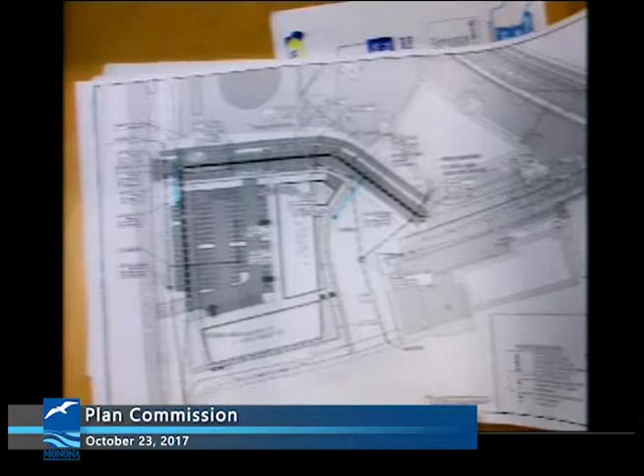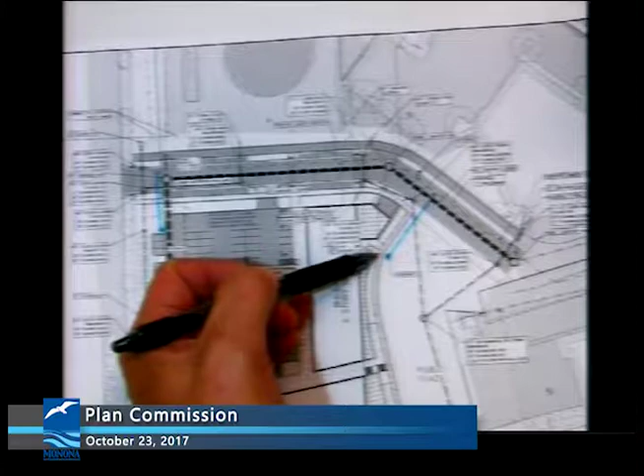So fire hydrants, you can see highlighted in blue here, 2 proposed fire hydrant locations. Monona requires that the building be within 300 feet of fire hydrants, all corners of the building. So they added the 2 fire hydrants, which is good. The only comment is this one is shown in the park right now. Sonia, maybe that's a question for you: does that get squeezed back, or where's the property line? Does that have to be on the private property side, back on the other side of the walk somewhere? Can that be fit in, or can it be allowed in the park? Probably just a planning thing as we move forward, but something to note.

The other small thing we were asking for last time, and again it'll have to be verified as they move forward, is fire truck access, and maybe you've already done those turning movements to show they can get through here, and maybe a detail of what's going to happen out here concrete-wise. I think the city just wants to know what that is going to be. Thickness, detail, what are we talking about? And again, pretty minor stuff as you move forward.

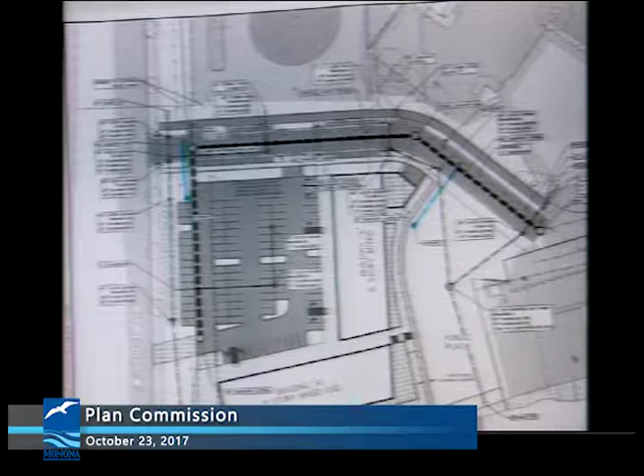So the bigger question tonight was on the stormwater. We've been waiting on the stormwater for the entire site, for the full GDP, and how that will look with just this first development and then overall fit in on the site. The requirements per the DNR, NR 151, and the city ordinance are going to require, because this is a redevelopment, 40% TSS removal, so total suspended solids that have to come off of this site in the stormwater. I should point out also that because of the soils on site, the infiltration standards don't need to be met on this site. So we're really just worried about the total suspended solids.

And that has to come from parking areas or the roadway. The landscaped areas, the roof water, stuff like that, is exempt. That's noted to have 100% removal, that there aren't solids on that. We're worried about parking areas and the roadway as part of the project. So we received their model as part of this.

Excuse me, I'm going to interrupt so I don't get lost. Yep, go ahead. It's super easy for me to do. 40% needs to be removed? Yes. 60% does not need to be? Does not. Okay. Because it's a redevelopment. If it was new, it'd be 80%. But because this is a redeveloped site, it's only 40%. Okay. Per the DNR, per your ordinance, which is pretty typical.

So we received their stormwater modeling, and at first they were reporting around 59% based on what they were going to do. I think, Randy, we worked through it a little bit. It's actually closer to 41. They're still meeting it at 41% removal, and I'll walk you through what the plan is and what they plan on doing as part of the overall site.

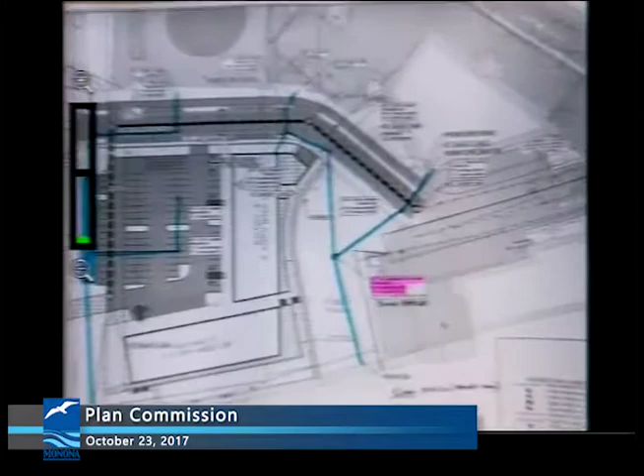Coming into that sump there, I tried to highlight this in yellow just so everybody could understand it. You'll see an invert elevation of, let's say, 842.65. Plus you have 3 feet below that for the sump, so you're around 839.65. The water level today out on the river is 845.20. So it's about 6 feet or so lower than the water.

Kind of like New Orleans. Yeah, a little New Orleans.

But now remember, the surface of this park is actually set roughly between 848 to 847. The 100-year flood elevation is 847.70, so it's about 848. And that's pretty typical. This area does, on a FEMA map, show that it takes on a little bit of water as part of a 100-year flood elevation.

Now, those lakes are controlled, and the target max that they want to be at is exactly the level it is today, 845.20. So they can control that with the locks, but if you have a giant storm over the greater Madison area, you do have a risk of that coming up. So we have to design for that.

So in order to get the TSS removal, the 5%, this all has to be set with sumps, and it has to go into this sump, and the water from the river can't backwash into it. If the water comes up and starts to flood the system, they don't get the TSS removal, and they don't get their 5%, thus you can't really model it. So right now, it's a bit of a difficult situation.

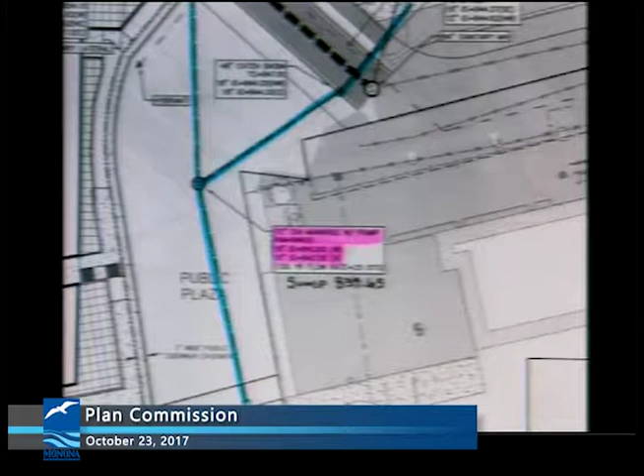We've talked about it, and in my report, I've talked to Randy a little bit about it. Can we remove some of the stormwater? And I think there's a possibility to do that. Maybe not take on quite as much volume here. Right now, A comes into this. Oops, I'm sorry, I forgot to zoom this out.

Building A comes into this network. And maybe A can come this way instead. The buildings can come this way instead, so they're not part of this network. Building C comes into this network, and maybe that water that falls there can also go out. And I think both of those are probably feasible options.

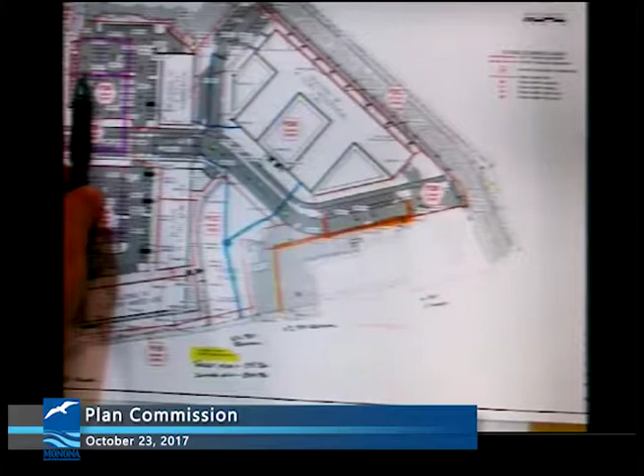So you could move basically the buildings and all the parking lot this way. And you could also, instead of all of Building C in 2 spots coming into this blue network, maybe you can get part of Building C to go back to Bridge Road, as part of that lot does today. Those are things we probably would have to work with the developer a little bit on, because the city's going to be ultimately in control of designing this street and this blue section of storm sewer along the road, this orange and blue. So I think there's still a little bit to be determined there.

It would be really great not to have a stormwater pump station in the park as far as an operation and maintenance concern. And there may be a few ways to do that. Right now, this road is set up so low to tie back into the yacht club and the breakwater that we have to maintain some of the elevations along here, which is setting the road low, which is also setting the storm sewer low. So if those buildings were out of there and we did not have to match in the asphalt, we could pick it up a couple feet and probably get this to drain.

And I still think maybe there's some ways through open channel drainage or a little bio basin down here. Randy and I talked about it, maybe we can raise this road up about a foot and be able to get rid of this pump station. But that still is to be determined as part of the project. It does work stormwater-wise. It's just probably not the best solution. Well, it might be the best solution, but we're not sure. I think we've got to vet it a little bit more, and I think that can be done. I don't want to hold back the development because that one piece still has to be figured out, but there still probably needs to be a little bit of work done there. So that's mainly the big stormwater push.

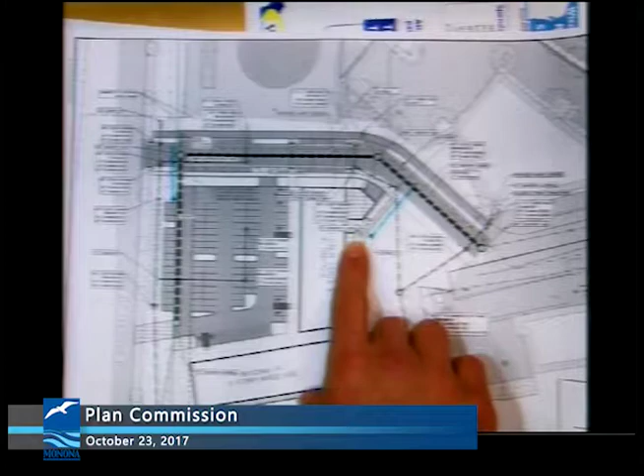And when I looked at the landscape plan, I went and checked that there's a spot there that you could probably just readjust a little landscaping and throw it in there. I think it would help the fire department, because that's where you look, and B, it would help for park planning not to have it in there. But I think the biggest thing for me is the safety on it.

Floodplain, are we good that we have no net fill in the floodplain? It does not appear that we're going to have any. Because I see some of the floodplain where the building's being built and where some of the patio's going to be. So did we just make sure we have a net neutral on the floodplain? I think maybe we should just double check it, but I believe that that's still flat and maintaining the grade along there, but that's something we can look at a little closer. We're allowed to do a little bit of minor grading as long as we just don't add to it.

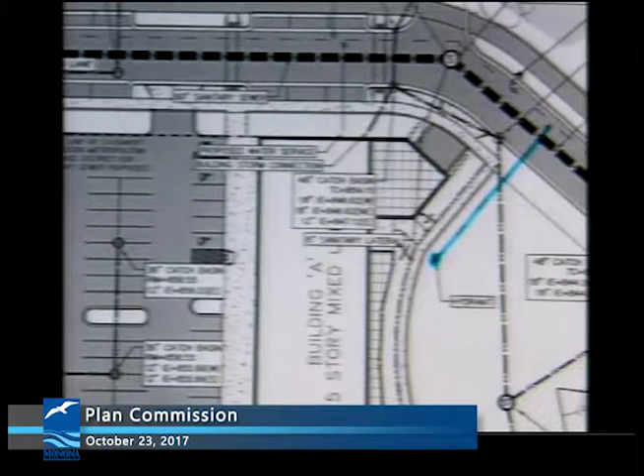As far as the park elevation going 47 to 48, the lake was at 46.8 for a time this year with all the rain we had. So literally, the lake would have been, with no waves, lapping at the edge of that park area, which is another good reason not to have a pumping manhole in the park, because it could very well go underwater. I know there's not a lot of waves on the river, but it was within a couple tenths of that elevation. So that, to me, could be problematic. So if we can have some type of a closed system where we can't get water into it, or trying to pump it back out, that would be nice, because then we're just recirculating the lake.

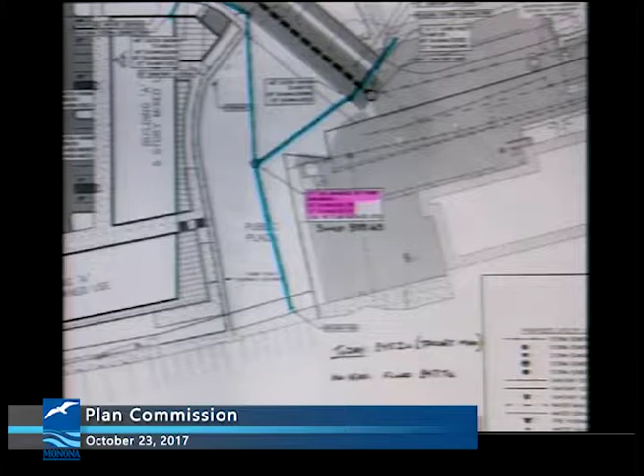That's it on civil. We talked about it a lot, and we normally leave stormwater to our consultant, and if you've read the recommended condition, it's that you work with Josh on it, and then if it doesn't work out and you think he's unreasonable, you can always come back to planning commission and say, hey, we've come to a head here, and we just don't agree. I don't anticipate that, but you always have that right, and that's why that condition's written that way.

Thanks. I have a question, at the risk of potentially the wrath of at least one person on the panel. And that is, if we're obviously so concerned, appropriately concerned, with the stormwater issues, I recognize that the 40% TSS requirement relates to parking and roadway and not to roof, but given that a green roof in fact reduces stormwater by 60 to 100% and cleans the water at the same time, would not looking at green roofs be another way to mitigate the volume, given that we're looking at increased cost of rerouting, regrading, or having to put a water feature in the park that we don't even know how it's going to be designed yet?

I mean, the hard part is, yeah, you're putting the green roof on, but you can't really model that. Are you going to be able to model that, Randy? Well, no, I mean, I think... Because that's exempt?

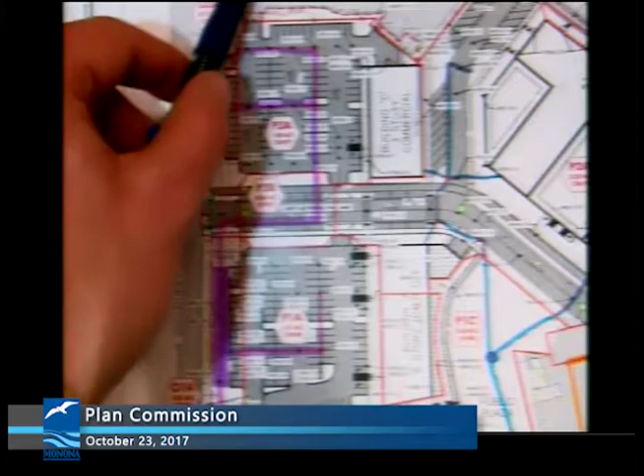The hard part with that: as part of ongoing conversations with Dane County Highway, we're putting some cross sections together through this area to show them and ATC exactly how that's going to look when this is done. It's hard to see on here, but there's an inlet from the Monona Bank and end wall here, as well as from the ditch further to the west. And there's an inlet that discharges into the existing swale now. At full build-out, we're going to have to hard pipe that all the way, because we are planning additional parking up on the west end here.

And so it kind of shuts that swale off and prohibits flow, and just based on proposed elevations in the parking lot through here and the existing sidewalk, it's pretty flat through there. So you will not be able to grade in a swale with the side slopes and get that to drain all the way back. In the interim, when phase one goes, we are simply going to stub out the storm sewer structure with an end wall and pick it up as it sits today. But once phase two and phase three ultimately go, that is going to be hard piped the entire way.

The only way to maybe get more is to reduce parking, and obviously, we've been down that road, right? So you're maximizing the parking, which limits the space that we have. They have the ability to treat some of the storm water, so it does push some of the treatment to go back down to the park. Regardless, though, down here at the park, you still have this issue with it just being so flat down here and water backing up into this line no matter how you set it.

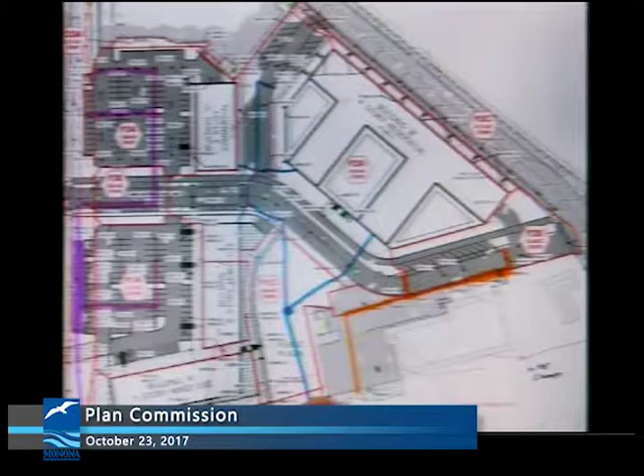So there may be a little give and take here, that even if we can get it to flow, maybe some of this line some days is full with a little bit of water. It's got a check valve on it at the bottom, and the pressures push it out, but once in a while, they have to clean it out because it gets full of sediment. Chris? Two questions. The last thing you said, a check valve. Do we really want a check valve? Because if those aren't maintained, then they become an impediment.

I agree. And if the water is going to back up in the line, the worst case scenario is it's going to come out the inlet in the road. Right. But once the water's that high, we still have the same situation. I agree with my experience with check valves. People don't know they're there 5 or 10 years from now. They forget about them, they don't get maintained, and they seize up. They just lock up, and then they impede the flow. Right. You just would have to clean it then, right? They'd have to come and maybe jet that out once in a while and clean it out. Probably. Yep.

Your idea here isn't horrible. Right here, we're outside of where you'd hard pipe it. Is there a possibility to get a little bio in there and pick up whatever cleaning we need, and if not bio, is there another way we could do it? Do you have borings yet? Do you know what type of soils you have? Yeah, there's some borings. They'll all be re-engineered anyway. Do you know how close you are to groundwater?

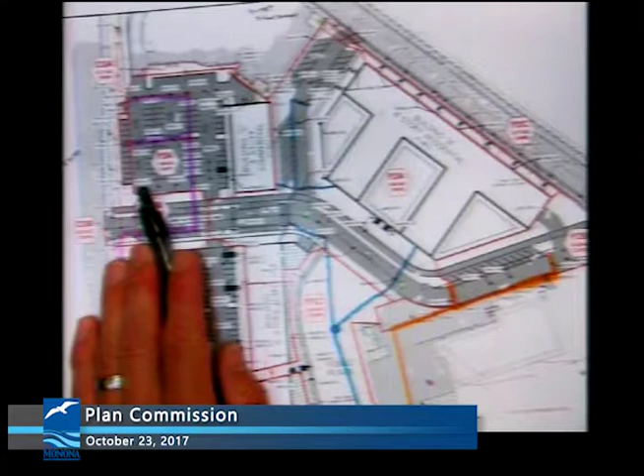Groundwater throughout the site, and correct me if I'm wrong, but I believe it's 844. So your parking lots are within 3 feet of groundwater. And our parking lot over there is up at about 858. Oh, wow. 844. A lot of that is coming up. Okay, so then my next question is, could we do a little bit of permeable pavement somewhere and get some cleaning out of it? And then the cleaning would all be taken care of.

Can I ask a question? Yeah, come on up, absolutely. You gotta come up because the people that are listening can't hear you. It's on Amazon Prime tonight, so if you want. Free for 1 week only.

One thing with these corners, and maybe you guys are gonna talk about that, is I think there's some signage that's proposed on one or two of these corners, so that might be another location, because I was thinking about maybe pushing this catch basin further up and filling that gap too, but I think there's a sign going there. The sign is on the east side of the drive. Is it? I guess my question, and then I can leave it to the experts.

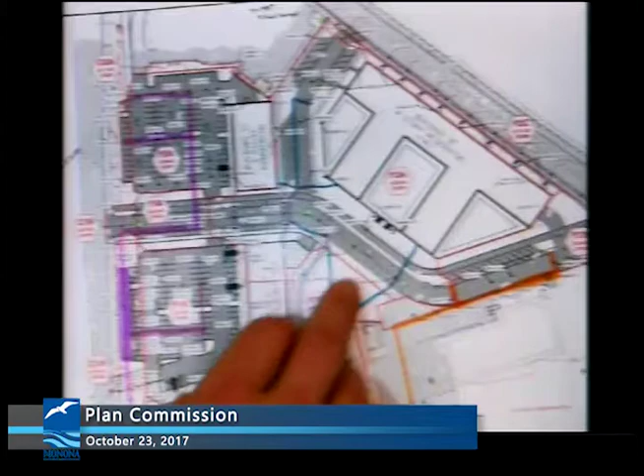Is it possible that when the Bridge Road reconstruction happens, we take both C and B to Bridge Road and divert it from the park? You know what I mean, and do some type of basins here to catch sediment and then take it to the park, or take it to Bridge Road? Well, you're talking just the buildings though, and the TSS wouldn't come from the buildings.

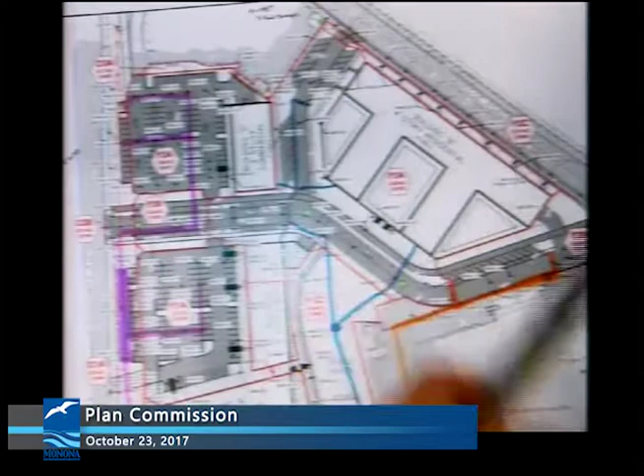Well, what about all this though? Yeah, that. You know what I'm saying? Yep. We'd have to lay some extra, maybe resize the stuff on Bridge Road, which there is a cost to that. May I suggest, although there's a cost to Bridge Road, we're also responsible for the other infrastructure, so...

Either raising this road or putting a pumping manhole to maintain in perpetuity is also a cost to the city. So as a trade-off, for the city's sake, I would much rather see something that's gravity flow and occasional jetting or vac truck. Totally agree. Meaning to Bridge. Yep, absolutely. And that's kind of where Randy and I left it as we were sitting here tonight. This all happened within the last week, so some of this information is fairly fresh.

But the idea behind it is 100%, can we try to get rid of this pump station? Absolutely. Can we do something up here? Can we do something different down in here? Maybe a combination, and whatever infrastructure we have in the park, try to keep it out of the middle of the park. I don't know what the plan will bring, but I think the big thing is just rerouting the direction that we're conveying the roof runoff. That might make a big deal. That's the big thing here.

And, as Josh had mentioned, the thing that's difficult is the elevations along the yacht club and some of those existing properties. It sets everything, and we can shift that low point slightly. The 100-year overflow, or the overflow route in case the storm sewer gets backed up, I ultimately want to maintain through the loading dock there, and go uphill from there. Again, it's a cost for the city to raise that road, but it also solves a problem for the city. So I would think the city would be strongly in favor of that type of solution along those lines.

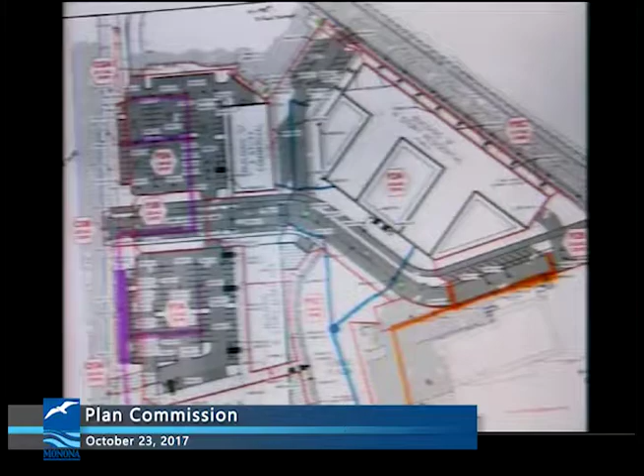Could I just ask you to address one of Chris's questions that wasn't addressed, because as you might imagine, I'm also interested in it, which is, given the content of the soil, the samples you have, is permeable pavement a possibility in any of the parking lot for that matter, not just a corner of it? Go ahead. Can I answer? I actually did a lot with permeable pavement.

I don't think the parking lot, the more I think about it, is a good candidate because you'll have too big of a run-on ratio. You shouldn't go over 3-to-1, you're allowed a 5-to-1, it's a lot of maintenance, and the run-on ratios in the parking lot would be extraordinary. But areas with on-street parking in the city right-of-way would be ideal places to put in a little permeable, with traditional pavement down the travel lanes but permeable where the cars park. We'll have maybe a 1-to-1, 1.5-to-1 run-on, so we'll get a good life out of it. If we're too close to groundwater, it'd just need a liner. But it sounds like it might not even be too close.

So you're talking like in here? Any of those parking areas, outside of where the traffic runs. Yeah. And we've actually done a lot of test work for permeable pavement. We've worked with a lot of communities on it, and that's a great place to put it. The mixes have come up so much in the last 5 years. There's a test plot on the east side of Madison we're still monitoring, and right now it looks like we're getting close to 80% cleaning. The standard will allow you 65; that's been updated in SLAMM. It started lower, now it's up to 65, and we kept it conservative.

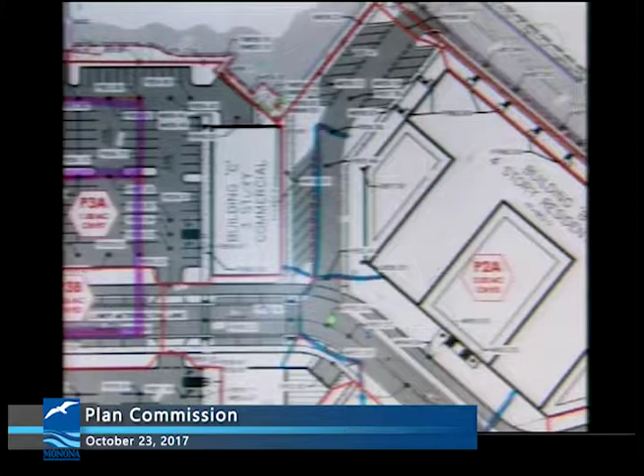So, to me, the way we kind of approached this was, with the maintenance costs of the permeable pavers, is that cost something that the city wants to take on in lieu of catch basin cleaning? And so, we evaluated what some of our options were to meet the 40% requirement, and we thought that this was the most beneficial. There is potential to place some bioswales in that area, but you've got to take a look at, now you've got sidewalk flumes running across that in the bike path, which isn't necessarily the worst thing in the world, to get water there.

And right now, we're running a typical cross-section, a crown street, but then our parking is pitched back to the curb and gutter that runs along these parking stalls. So some of those things we can easily revise, elevation-wise, and get water into those areas. It's just the benefit of, and probably for a bioswale, I would say yes. But what does that do to our overall loading? We'd have to evaluate what that does to our loading for this pink area, because I know it's 30%, and I'm sure that would increase. Do we still have catch basins with sumps then, or do we completely remove them, to meet our 40% requirement? But it is definitely a possibility to put those in.

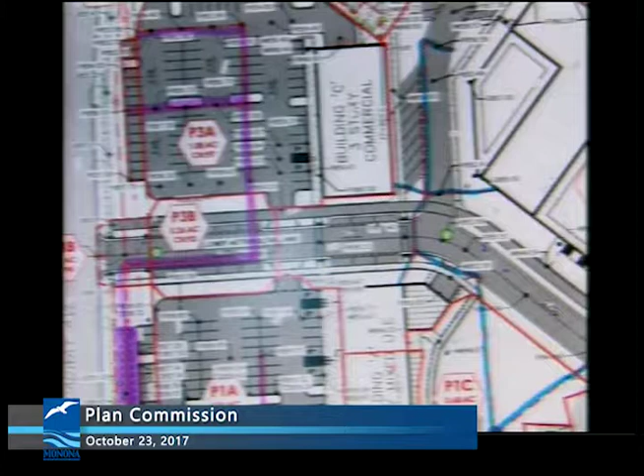Or could you structure it so that there'd be an under drain there that could convey that water away from that wall, or is that still too close? They don't allow infiltration within 10 feet of a building wall. Oh. That would be tough. So worst case scenario, you'd have to line it. If you had engineered soil and lined it, you could still get your water quality benefits. I just mean, it's another option when you look at it. But you might be able to get something along this side. Potentially. It'll be easier.

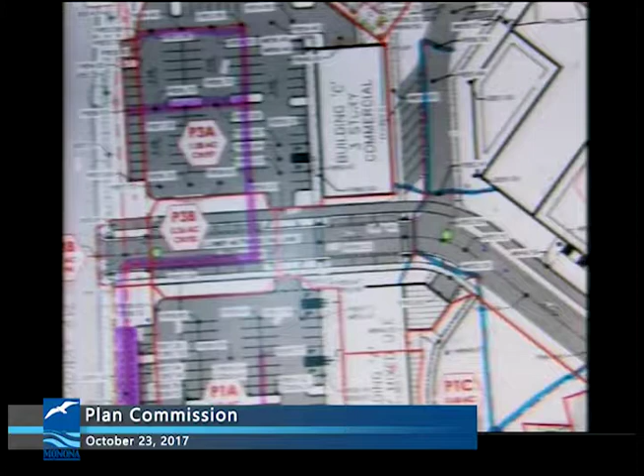Other questions related to stormwater? Get rid of the pump. Right. I guess right now, the way to look at it is worst case scenario, we have a pump station that we do not want. Better case scenario, we work on this so we can try to eliminate that and we have a better solution. But it does work with a pump station, so they can meet their 40%. It's just in this case, we'd like to try to do it differently. And I think we can, but we have to work on it a little bit more.

So, Nancy, can we separate the approval of civil from the lighting and landscaping? I think so. Or Brian? That'd be fine.

I actually have another question related to your report, and that is, there were a number of other items besides the sump pump issues. Specifically, number 4, you said the previous comment discussing location of lighting poles still stands. Yep. Number 5 still stands. Yep. Number 7 still stands. Number 8 still stands. Yep. So where are we in relation to addressing those?

Because it sounds like from your report, your other comments from your previous report weren't addressed. Yep, correct. As I stated in the beginning, those things still have yet to, we're waiting to see them. And I don't know, Sonia, what your thoughts are on that. As part of the originally approved PIP and GDP from June 26th, we're required to work those things out with the applicant prior to approval of things like building permits, so they will be addressed. Okay. They aren't seen as big overall items, but something they can address as they move along.

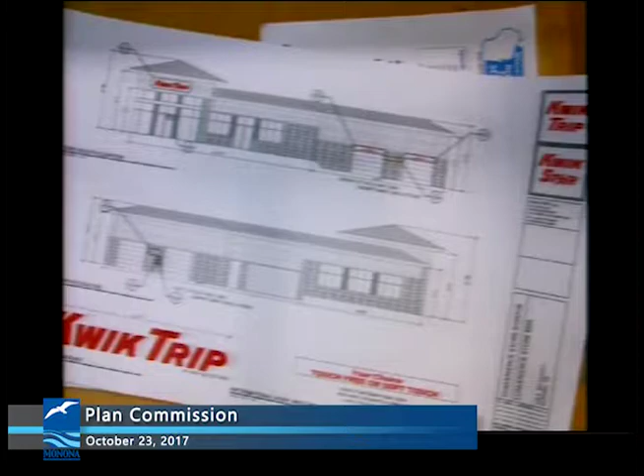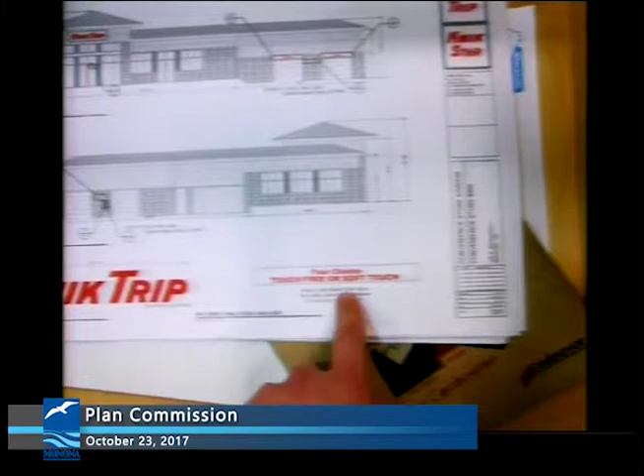So basically, this right here is going to be the wall sign on the south elevation. It just says Kwik Trip. It is a red LED lit sign. We have a 12-inch tall by 48-inch long car wash sign. It basically just says your choice, touch-free or soft touch, and this is a non-lit sign. Moving on to the next portion.

If no one has questions so far, I don't think anyone does. We're going to be looking at the west elevation. It is just a Kwik Trip sign on the building, and it is a 2-foot tall and 12-foot across by 1-inch LED red high LED letter that will be mounted directly to the wall.

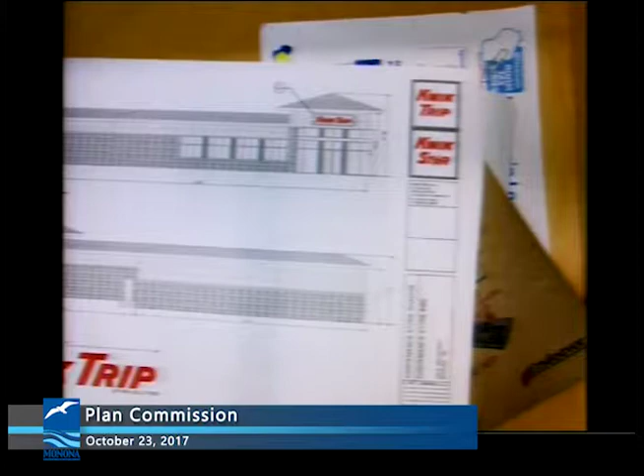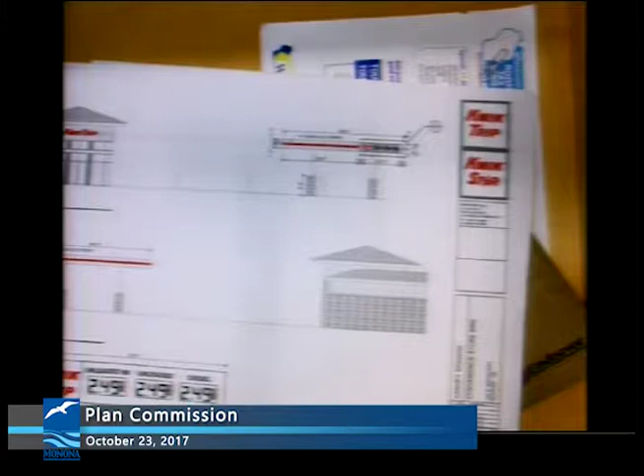The next thing we're going to move on to here is the pricers with the Kwik Trip logo to the left portion on the canopy elevations. There'll be 2 of these. Again, I believe these are within guidelines in Monona. Again, I'm not positive, but I believe this was already pre-approved to my knowledge. So if anyone has questions. This is basically the other canopy elevation with the Kwik Trip price reader.

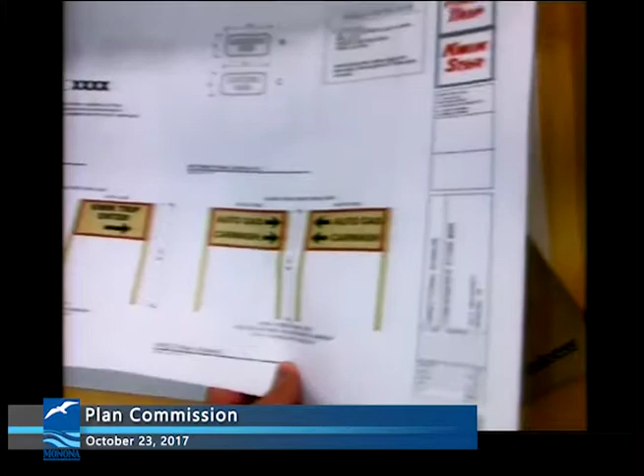This package here is the south side and north side Kwik Trip enter signs, as well as the south side, north side auto gas car wash signs. They're double-sided signs, they're 4 feet tall, and within guidelines, to my understanding. Again, I'm from the Milwaukee area, so I'm basically clueless here. So you guys gotta let me know.

Again, just a bunch of other 4-foot post and panel signs on the west side and east side elevations. Auto gas car wash and enter sign, as well as an auto gas car wash on the other side facing the west side. We also have a single-sided directional sign on the west side with an access to the car wash arrow. These signs are all the same size.

The last piece of paperwork I have here for you guys is just a general site plan for the new Kwik Trip. Over here we have the gas fill-up section, we have the new store, we have Roselawn Avenue on this portion, we have Monona Drive on this portion, and then we have East Broadway on this portion. So that is the general overview of the project. Go ahead.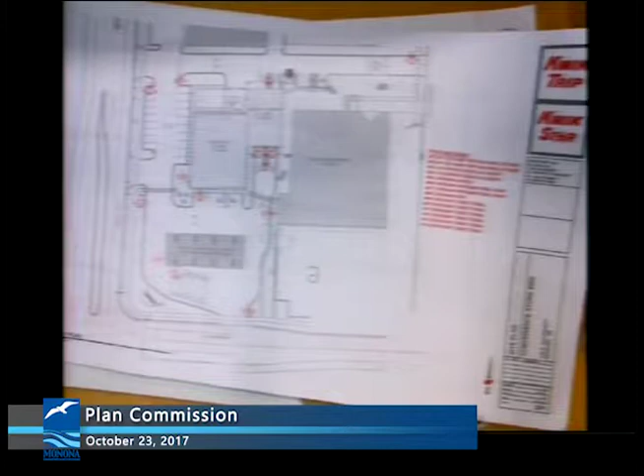So I want to point out some of the reason that we asked to have this on tonight's agenda was, one, there was a switchover, although much of this was part of our previous conversation. I felt like given there was some change in color and schematics and other pieces, that it was important that this group actually have a look at it, even though there was likely no concerns. As you can see in Sunny's report, there were no major concerns, and a lot of these things have been discussed at this group already. I just wanted to throw that out there so people are clear why we're here. So, thank you.

I have one question. Yes. And Sunny, you might help me recall the sign number 9, that directional sign, which is back on Roselawn. Was that in our previous site approval of a directional sign on Roselawn? As far as I can remember, and my records show, we didn't actually approve any signage plans. They were probably included in some materials as concepts, but we didn't look at it at that level of detail.

As Brian's just indicated, obviously this is a recommendation from you. Do you want to say anything more? Yep, Plan Commission approval is required because it accompanies a zoning permit, which this received. I have no concerns as summarized in the staff report, and approval is recommended as proposed.

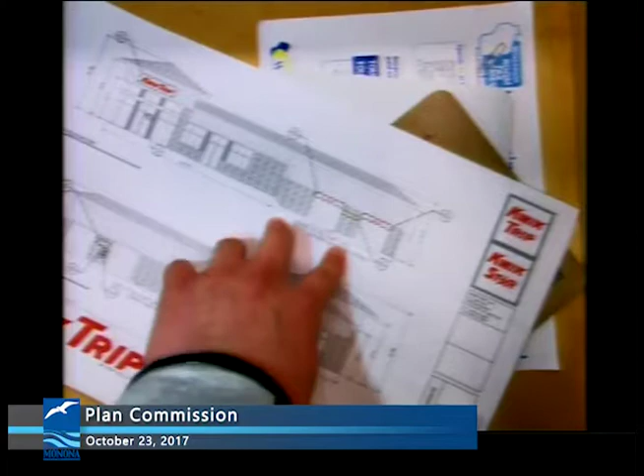Dale? The only question I have is I unfortunately was not here when Kwik Trip came back through with their revisions from the PDQ. Am I assuming correctly that the beige directional signs relate to the colors on the building? Yes, they're going to be a pretty close match. I'll put the drawing back up on CS1. They'll be pretty similar to this desert sand color on the 12-inch by 48-inch long car wash signs that basically say enter and exit, and those are non-lit.

Okay. I was just wondering why the color changed. I couldn't tell you that one, to be honest. Well, I assume they related to the building, but without a color drawing of the building. That's it, they're fine. Any other questions? Do we have a motion? Move approval. Second? Second. All those in favor? Indicate by saying aye. Aye. Opposed? Motion carries. Thank you, guys. Thank you.

Section D, public hearing on request by property owner Joe Linzig for approval of a zoning permit for exterior alterations and facade improvement grant project at 6324 Monona Drive.

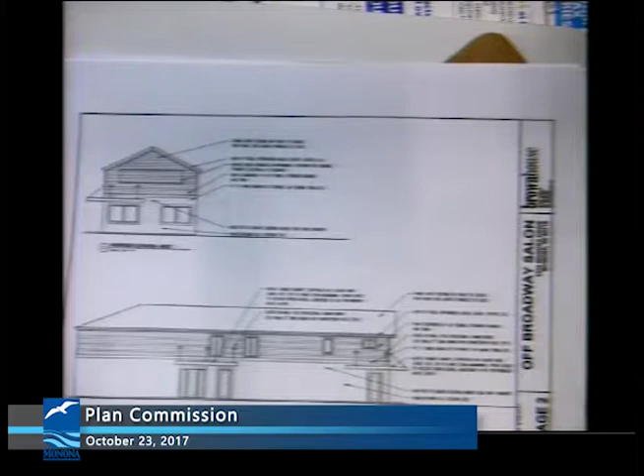Questions for Joe? Chris? Comment first. Excuse me. I think it clearly meets the parameters of our facade grant. We could argue about the pennies, but there's enough money being spent here that it meets the parameters for our facade grant program. I think that's one of our main considerations for tonight, is it not? Yes. Fine.

Sonja, can you help me remember if this property has come before us for a facade grant in the past with the previous owner? Still when Joe owned the property, it was here a couple of years ago, and I think it was completely different at that point, what you wanted to do as far as design. I don't even know if we came before you with the facade improvement. Was it here one time? It was here at one point for a pre-hearing conference, but didn't move forward. I apologize, I don't even remember that because I've been on so many different projects.

Clearly this meets the standard that we had, and I was just curious and trying to remember back with the previous one, and if there was approval or a denial, and how substantial a difference, or maybe it was just general feedback at that point. Yeah, and I think it just didn't move forward, perhaps your timing. So I don't think there were any major concerns with it. Looks good. Thanks.

Chris? And then our other item of consideration tonight would be a zoning permit for what he's proposing to do, correct? Yes. And I think we came here before, I probably mentioned it too, but that island out front is begging for a tree. I was begging to have them plant one in there. I know, I'd like them to change the dirt in there too, because they loaded it full of gravel and sand. It's still begging to have a tree in it. Yeah.

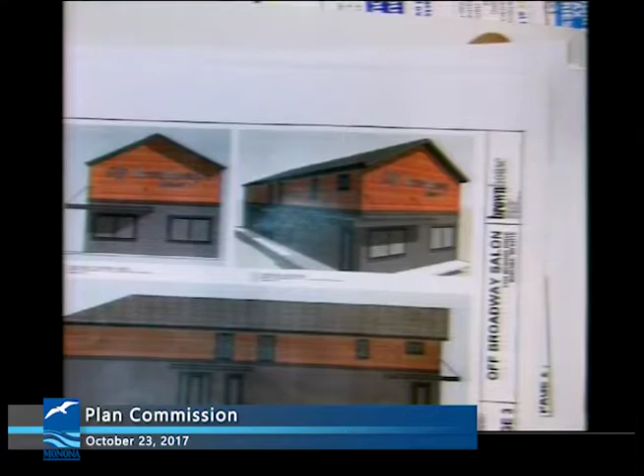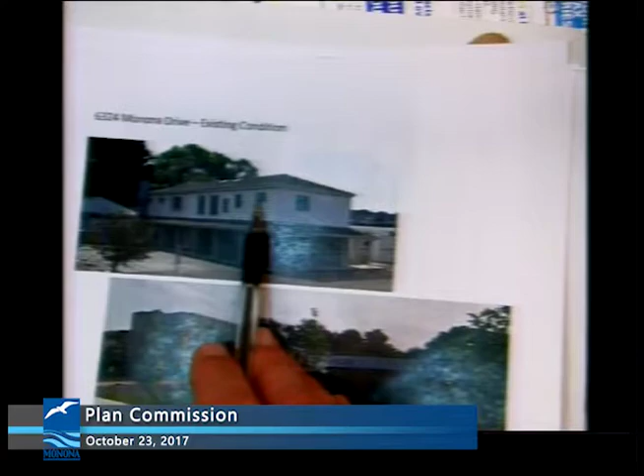The rendering does not include windows, or are you eliminating a lot of windows in the apartments? We're only eliminating one up in the front, on the face of Monona Drive. That window is actually situated right here. The other windows are staying where they are. There's not a lot of balance to that building, so we're at least trying to balance. They're just not rendered. You just left the windows off the rendering on the north elevation. Yeah. This window's here, this window here, this one is an air conditioning unit here. And this is a window, we're missing the air conditioning unit here, so that's a window, there's an air conditioning unit.

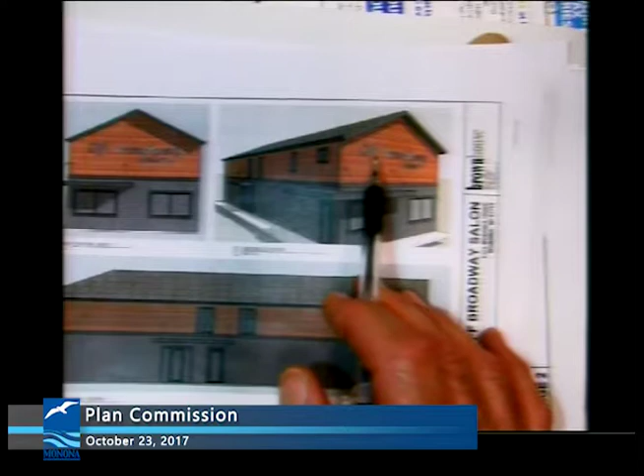Actually, it's not exactly right here. There's two sets of windows. Are you getting rid of any windows on that side? No. Okay. No, but we're getting rid of the window on the front, and it's situated right here. We're just trying to balance that out a little bit. You just want something to excite. And signage. Rob, any other questions? I agree with Chris's comment about adding some detail on that side. Looks good. We even thought about, we got that nice cedar up above, and bringing a different color wood product down in them doorways is probably the route we're gonna go, but we do have metal products available to us that we can add in some areas.

Sonia, would you like to share your recommendation? Sure. So just to outline the process, this is a pre-hearing conference. We won't be taking any action tonight. First it goes to Plan Commission for a public hearing, and we hopefully have a consensus on whether it's eligible to move forward with the facade program. Then we take it to Finance and Personnel, which will happen on November 6th, and they will review the proposed grant amount of $10,000, and then it comes back to Plan Commission for final action with any revisions that were requested. Things that we've already discussed will be in the notes, and the staff report also notes that we should see the elevations of the south and east walls. Are you proposing any changes there?

No. So the south elevation that faces towards PDQ will still be the white vinyl siding? No, we're gonna wrap that around, at least, I believe, 20 feet back. Okay. And then we're hid by the building, and that vinyl will come down, but we'll probably put vinyl up that matches closer to the cedar. And the east side, it'll be vinyl in the back too. There is a garage that's not shown here, that two-door garage in the back of that property. We're gonna match. That's not even shown or bid on this. All right, I don't think we even did that.